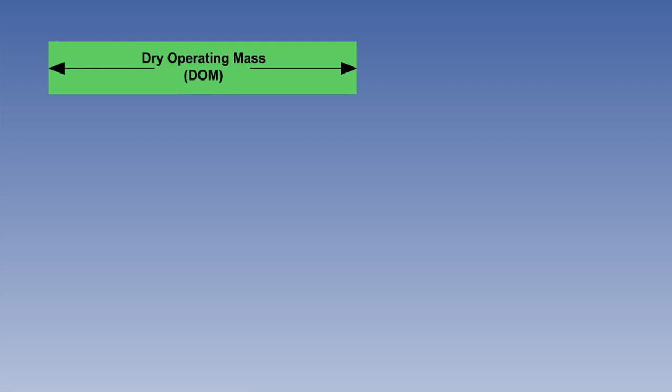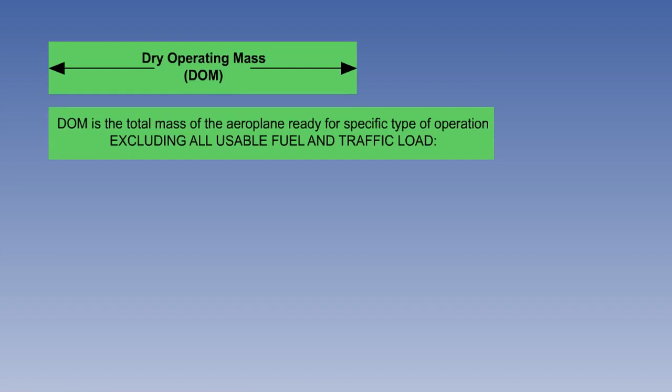The first definition is dry operating mass, often abbreviated to DOM. This is the total weight of the aeroplane ready for a particular operation, but without fuel and traffic load. It will have everything else on board for the flight, including the crew and their baggage, in-flight catering equipment, food and beverages. In fact, everything except the passengers, cargo and fuel.

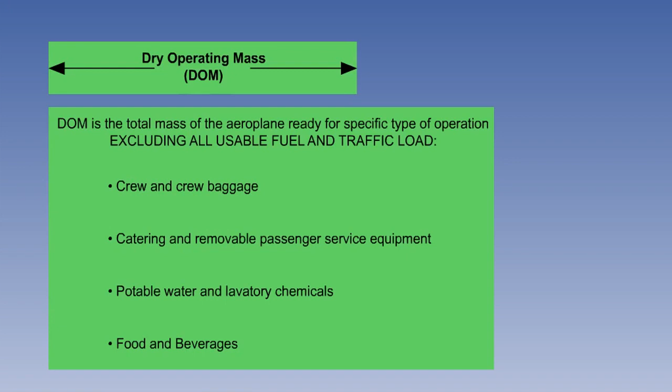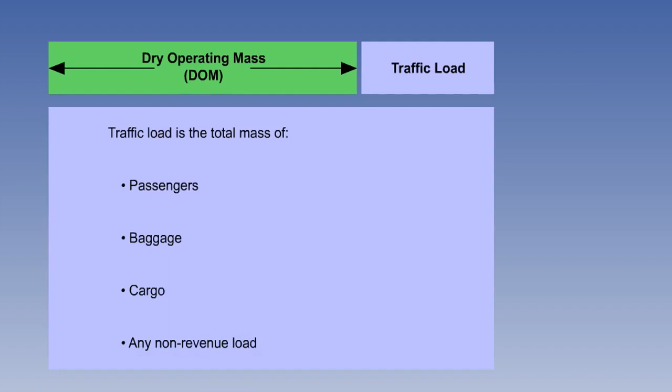The traffic load is the mass of passengers, baggage and cargo, including any non-revenue load. The zero fuel mass is the dry operating mass plus the traffic load, but without any fuel. We next come to the definition of maximum zero fuel mass, MZFM, which is the maximum permissible mass of the aeroplane with no usable fuel.

The reason for this limitation is that the majority of the fuel is carried in tanks within the wings. If there is no usable fuel in the wing tanks, the fuselage becomes disproportionately heavy, and undue stress is placed on the wing roots. If the aircraft is at its maximum zero fuel mass, any increase above this limit must be fuel only. The maximum zero fuel mass may determine the amount of traffic load that can be accepted.

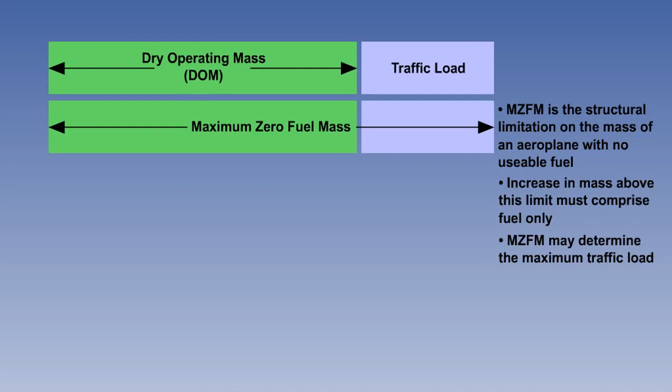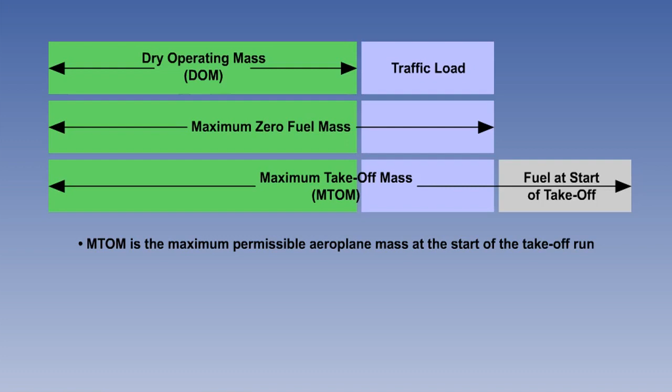The maximum structural takeoff mass, also called the maximum takeoff mass, MTOM, is the maximum permissible aeroplane mass at the start of the takeoff run under normal circumstances. The next definition, maximum structural landing mass, is often referred to as maximum landing mass and is abbreviated to MLM. Assuming that there are no other restrictions on the landing run, this is the maximum permissible total aeroplane mass on landing in normal circumstances.

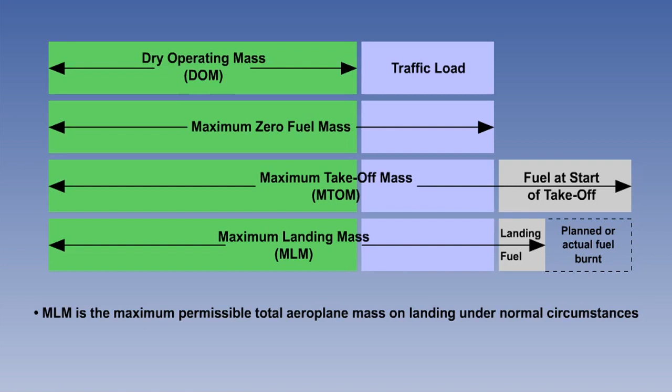The definitions we have covered are all found on pages 2 and 3 in Section 1 of CAP 696. They must be learned and understood in order to be able to calculate the optimum payload that may be carried under differing aircraft configurations. This will be the subject of the next lesson.